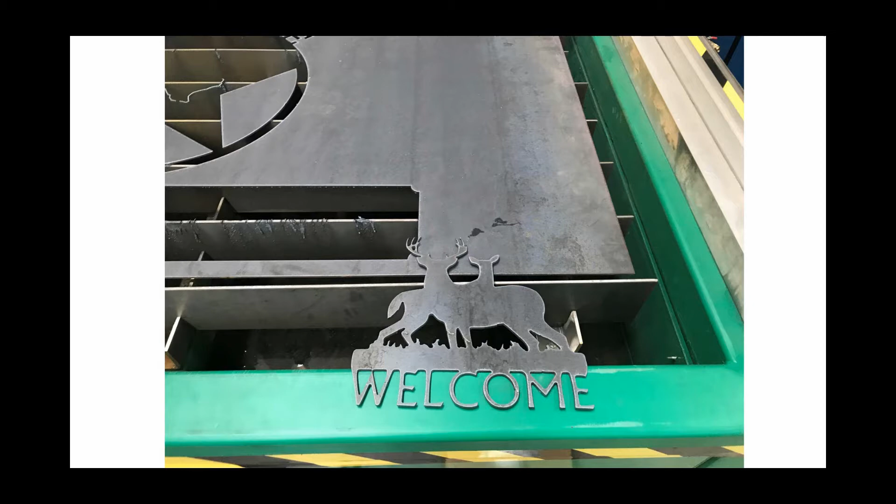So, for instance, this is a simple welcome sign. And the part could be easily imported from Google. You can actually go from a Google image to a part in a matter of a couple of minutes. And we teach you how to weld the drawing together. This is actually a fairly simple project.

This one here, you can see that they did the cutout. Really nice cut quality. You can barely tell where it was started. And actually, you can take your fingernail and just knock that blow-up off of where it did the initial pierce. Looks like another pierce point here. You can tell where they're at, but they're fairly fine. And more than likely, this wasn't done with fine cut consumables because it's even finer in most cases if it is. And here, they left a little bridge here to keep this piece in.

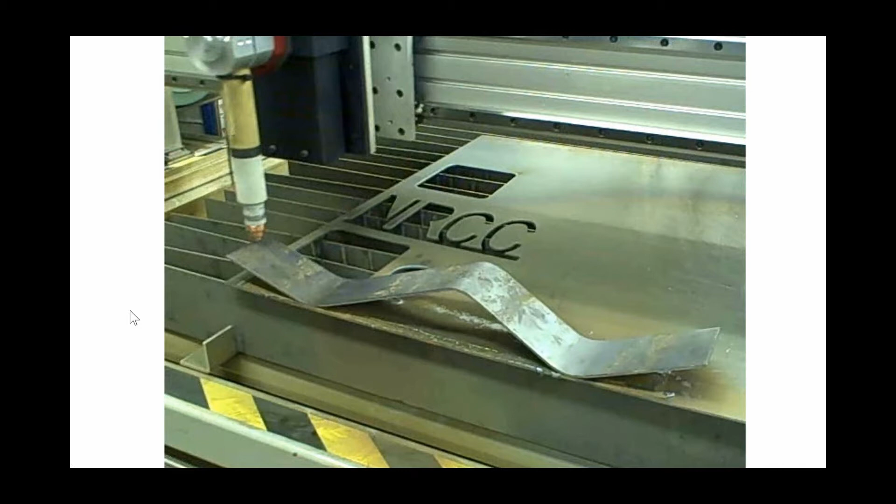One thing that's important in a plasma torch is a really good torch height system. And we have an automatic torch height system that's second to none. I like to brag about it by showing you this video. And the reason it's important is when the metal is heating from the cutting process, it'll tend to warp. Now, I've never seen metal warp this much, but if it can do this, it can certainly account for the smaller variances from the cutting process. So this is to show you how severe it can actually be, and yet it will keep up with it.

Little blow-off because of the varied height, but that will actually knock off very easily, and it didn't crash. The other reason why it's so important is you don't want the tip to touch the metal because it'll shorten the life of your tips, and sometimes it'll actually put the flame out. So to keep it moving and to have the best possible quality and a long life of the consumables, an automatic torch height system is crucial.

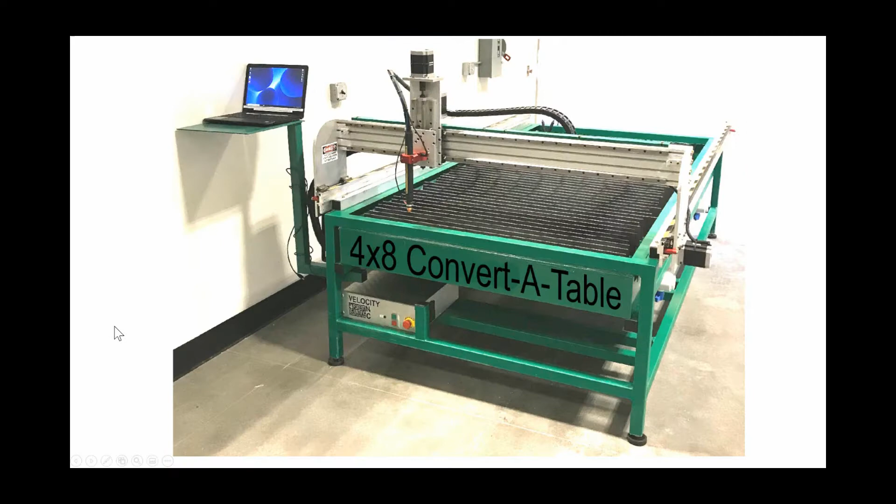This is the Convert-A-Table. We're the only company that has a product like this because it's completely a router and completely a plasma cutter. And so it has a routing table that actually allows you to hold the wood in place, and it seals the water bed. And it's about a 10-minute conversion to go from a wood router to a plasma cutter. You take the wood cutting table off, switch out the router head for the torch, and you're ready to run in plasma mode.

This is often used in schools that don't have enough space for two machines, or maybe the budget's tight, so someone will start off with this and then they'll add a router later on. Or maybe it's like Alaska where it costs so much to get it up there and then the classrooms are smaller just because of the cost of building construction in that part of the world.

A lot of schools will want to have an actual separate router if you're going to be doing a lot of cabinet making, because we don't offer a vacuum table on this type of unit. It's only a clamping system, and it's always best to have a vacuum table for a router that's going to be doing cabinet making. But this gives someone an option to start off with the capabilities of both machines if the budget doesn't allow for both machines, and then leave it as a plasma cutter and add a router later on.

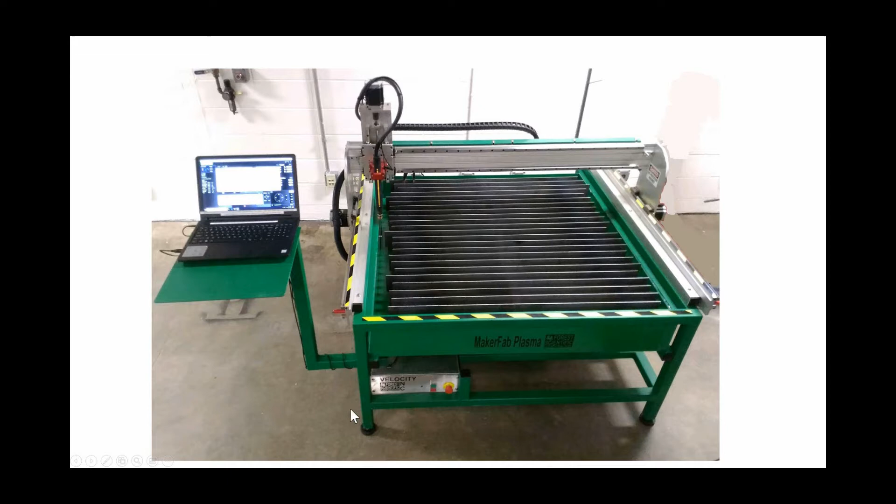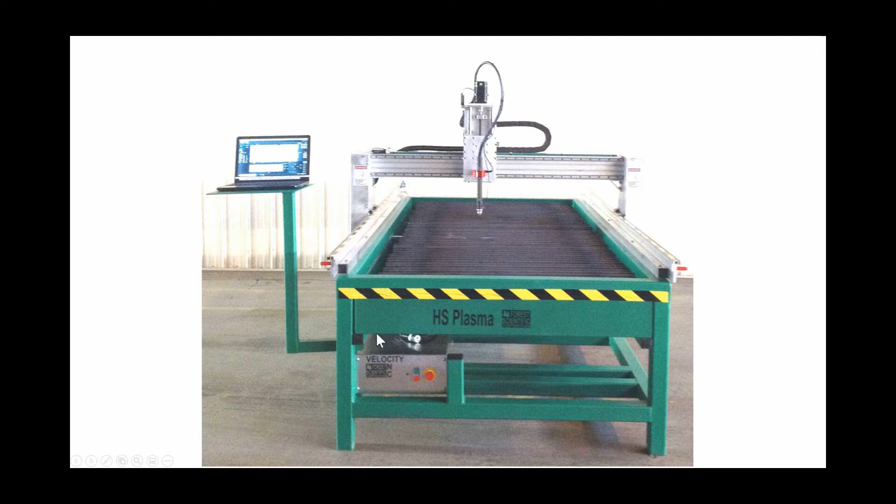It's even heavier duty steel construction, and it also uses closed loop servo motors versus these stepper motors on the lower costing models. I'd love for everyone to have this model because it is the very best. However, anything that can be made on this can be made on even the entry-level machines. Might be a little bit slower, but anything could be done on each level. No one's ever been disappointed for going higher.

And we also offer a trade-in program so that, say for instance, you are on a tight budget, you could start off with a lower-end model, and then if you purchase a higher-end model within the first year, we actually give you 100% credit of the purchase price to upgrade to a higher-end machine as time goes on. So you're not stuck with a box of parts without all the other parts you need, sitting there for years until you can put it all together. You actually can start off with something and make it usable.

We have various advantages. Number one, we have been around for a very long time. Most of our competition has not been making CNC machines for over 31 years. And so we have experience and longevity of being around for a long time. Our machines come fully assembled.

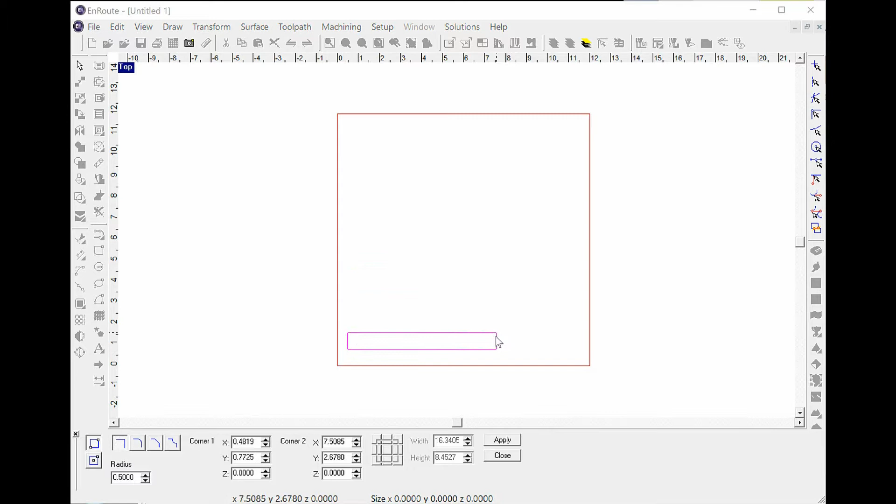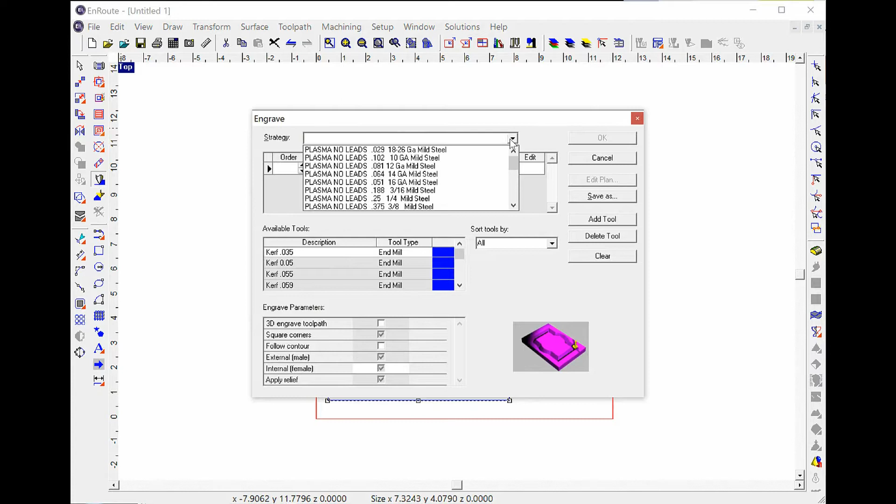So for instance, if I'm just going to draw a simple rectangle, I can draw this rectangle, and I can select engraving, which, when we're using plasma, is just telling it that it's going to be the center of the cutter on the center line versus actually engraving. Although it is possible to do an engrave. This time we're just cutting center of the line. What I'm going to do is select a strategy. I'm going to say 12 gauge steel, hit OK, and that actually generated my tool path that I can cut this out.

Instead of cutting right on the line, I just hit this button to delete the toolpath I just made. I can do a kerf compensation. So if I click on kerf comp, I can select, again, 12 gauge steel. I can come in and tell it I want to have a lead in. I can set the angle of my lead in and hit OK.

Now, for full disclosure, I'm going through this pretty fast. When you get a machine, we actually come in, set it up for you, teach you how to run it. We go quite a bit slower because we want you to actually do it and make sure you really know it. We're really on a very short period of time, so I'm trying to cram more than we can actually fit into the time period.

So anyway, I'm going to edit my entry exit, and I can actually turn this lead in line so it's here. And notice these little arrows, that's the direction I cut, so it starts off the part and comes off. Another way that we could cut out this exact same piece, and I'm going to delete this toolpath, would be to do a kerf compensation, but instead of doing a lead in on the line like that and staying right on the line, we could do a loop corner. And I'm going to give it a 1/2 inch offset and hit OK.

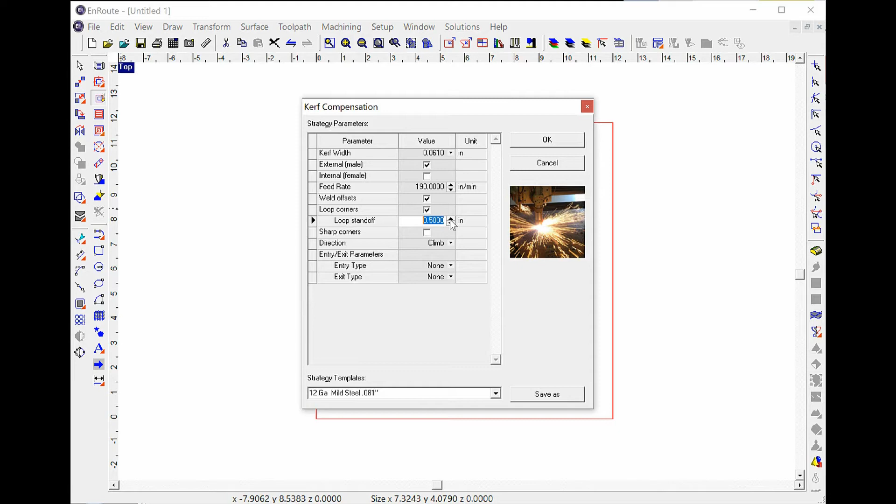So with plasma cutting, the plasma cutter is very greedy. And if you slow down to go around this corner, it may round the edges a little bit because it's always trying to get as much material as possible. And so this feature takes it off while it's going in and out, because even if you're driving a Ferrari, you can't make a turn without slowing down to make that turn.

So what this does is it loops off and then loops back on, so that way all of the accelerating, decelerating is out here, just like the car going too fast. And then when it gets back to this point, it's in the straightaway and continues on, slows down, makes that turn, slows down, makes that turn, and continues on. Now in this case, it's starting here, so I want to change this starting point as well. So I'm going to hit Edit Entry Exit, just drag this over, and then right-click, exit this tool.

And so from here, you can cut on the line, you can cut beside the line, you can loop off the edges of the lines to get the very best of cut. A very common project in most schools is signage.

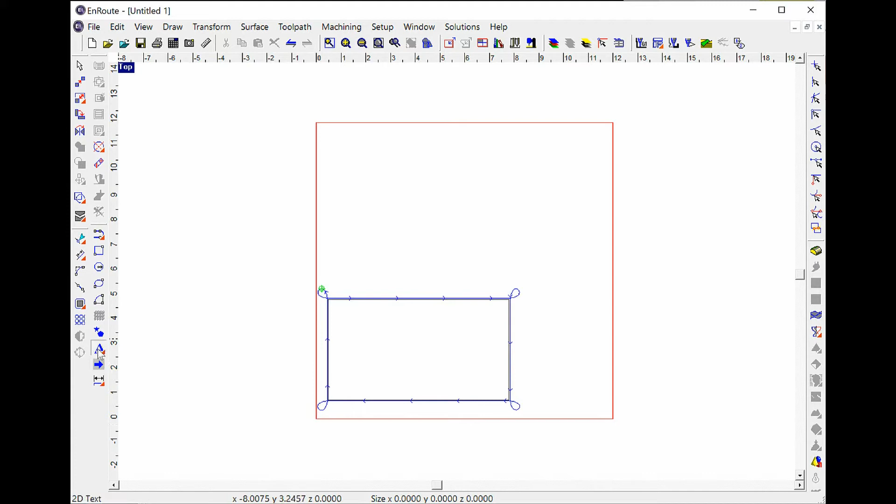And so if we go to A for text, and we come, say, to here, and I'll just type ABC, notice that these are a stencil-like font specifically made for plasma cutting. As far as I know, no one else has a font like that.

And you can also go in and very easily create your own fonts by altering the letters, which is what most people have to do. So if we wanted to, we could just do some edit, trim and extend, and cut out and modify any font to be able to work for this machine.

So right now I'm going to just cut on the line. So I'm going to click Engrave, select my steel thickness, 12 gauge steel, hit OK. And again, you see these arrows. Now, little tip, toolpath, edit, entry, exit. If you're starting a line, you may see a little divot. But if we come into this little corner and do an inside corner, very rarely will you really see it, especially if we're using fine cut consumables.

So I'd like to mention the consumables. With a PowerMax 45, which I consider the most ideal for most schools, because most schools are only cutting 1/4 inch and below. Now, if you're going to be cutting thicker materials, you can go up to an 85 amp torch or even larger. But since the vast majority of schools may be 3/8 and under, I don't recommend oversizing your torch. You're better off having a torch that's in the sweet spot.

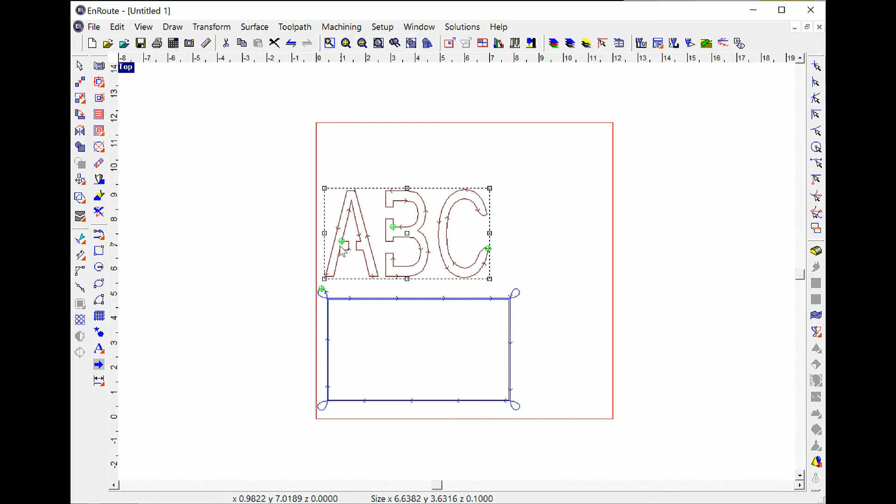So if you have a 45 amp torch, you can do up to 1/2 inch thick. But the sweet spot is really that 1/4 inch and below, and you can use these fine cut consumables. They'll actually give you a laser-like cut quality.

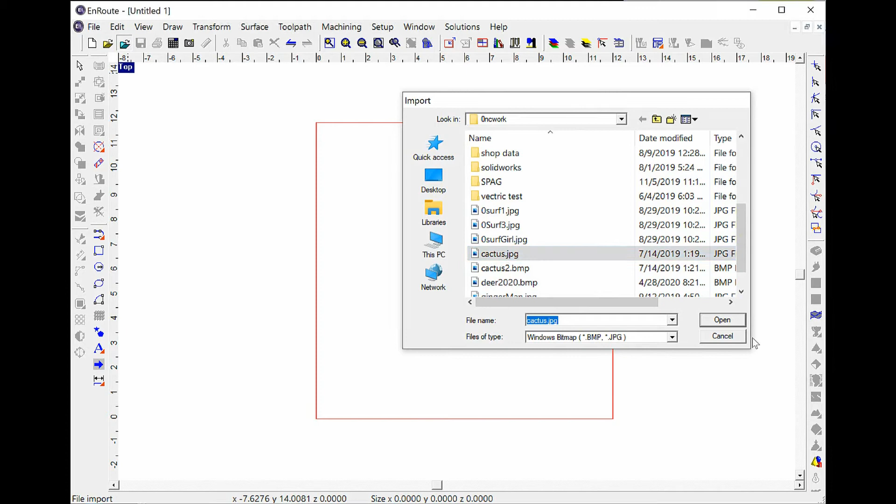And not only can we do letters and things like this, but we can also bring in things from Google. So if I go into Internet Explorer, or maybe Chrome, whichever browser you like, I could do a little search and download a piece. So I have pre-downloaded some objects. And so what I'm going to do is bring in this cactus. And with this cactus, I'm just going to hold down my Shift key and bring it down a little bit. And oops, I resized it a little bit too fast there.

And all I have to do is click on this option here, and it will convert this raster image into a vector image. And so what I'm going to do now is go to Transform and Ungroup. And I want to get rid of this right here. But I don't like this little divot here. So what I'm going to do now is edit this curve.

And I can quickly come in. I think I'll just delete this little point. I'm going to zoom in so I can see what I'm doing a little better. I'm going to delete this point. And then I'm just going to click here and drag this up. Yeah, looks like I need to get rid of a couple more points here.

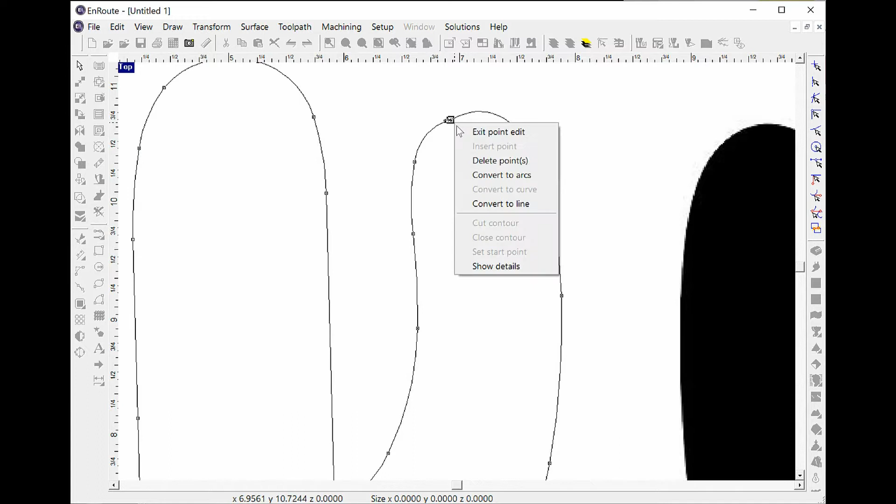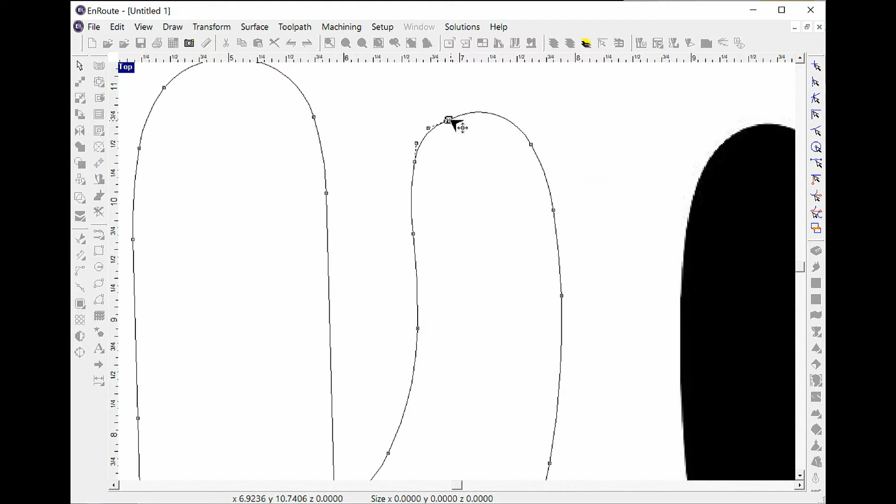And now I've edited the artwork that was less than ideal that I grabbed from online, and made up for it. And let's go to one more point. Probably get by without it. And now it has the nice curve that we actually want. So we start off with this with something written on it. And now we have a cactus that we can cut out.

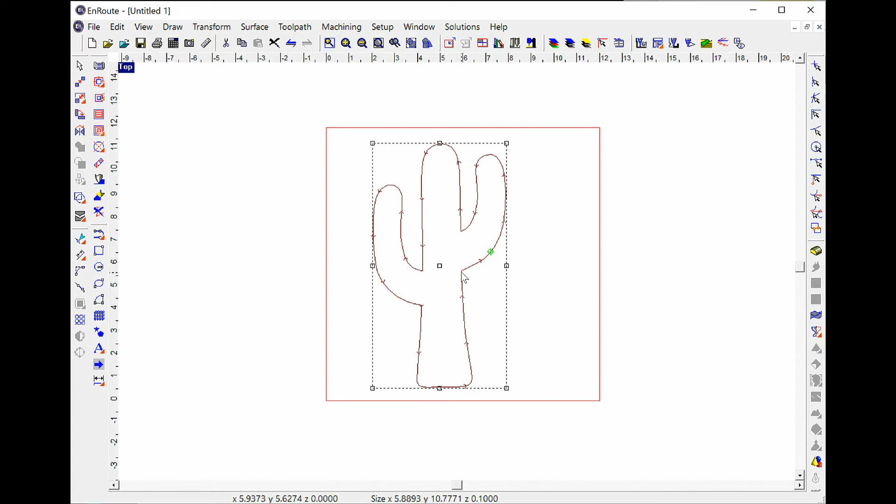And so again, if we want to cut it out, we just click on engrave, select our thickness. And again, it's not engraving, it's just that the center of the cutter is following the center of the line. And again, I'd like to hide this in here. Toolpath, edit, entry, exit. I'm just going to drag it into this inside corner. Right click, exit this tool. And then all I have to do is go to machining, output to file, and that'll create the industry standard G and M codes to actually make this part.

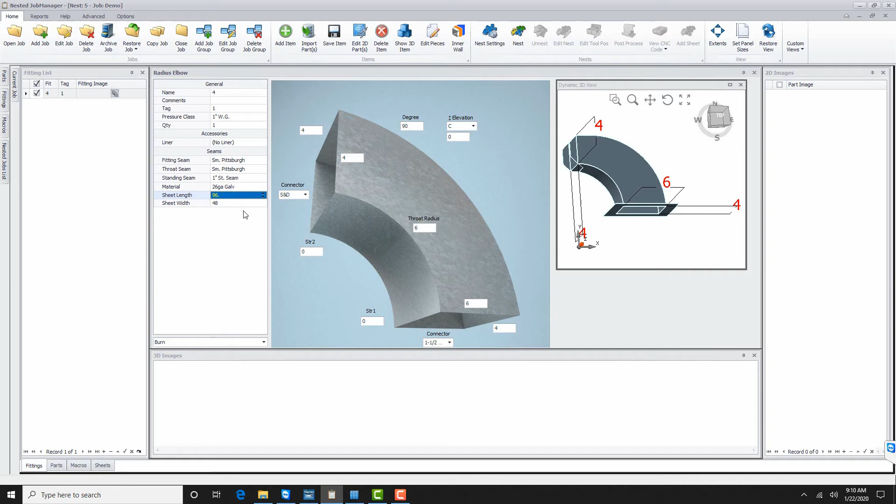We're going to make one of these, I assume. 1. No liner, so that would be your insulation. Fitting seams, small Pittsburgh. Throat seam, small Pittsburgh. And then if we were to have to chop this, it would be the standing seam. Right. Material? 26 gauge galvanized. And then the same sheet size, 96 by 48. Correct. If that all works okay, everybody's happy with that, we would go to save.

It'll generate your 2D images here and your 3D images here. Then we would go to nest settings, tell it we want to nest all of them, just the one. We would change the sheet size back because it remembers what you used last. If that's all okay there, go down to nest. And you have your one sheet. It's only using about 14 inches by the 48 long. So then it would actually just trim off that excess, and we'll watch it do that there.

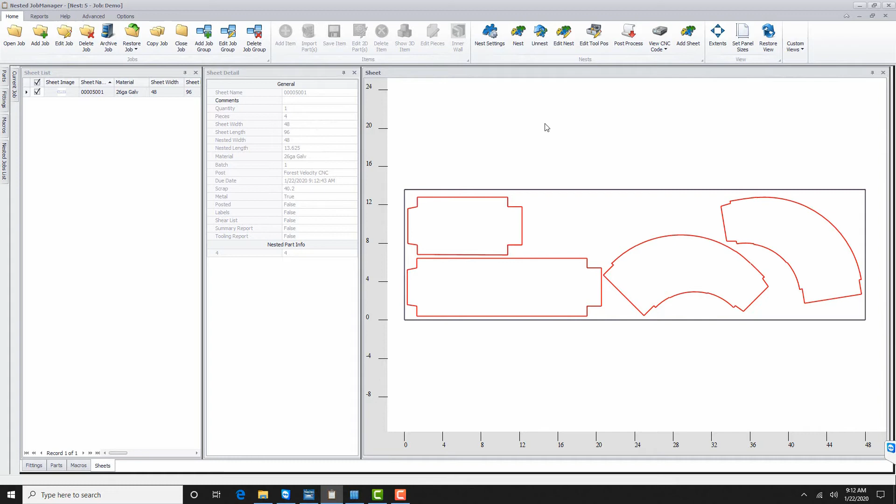If that looks okay to you, if you're happy with that, you would post it. Make sure your path is correct. Make sure, again, your amperage is correct and your gas is correct. And then here, same thing, just reports, nest summary. Your summary and your labels you have to do after you've posted it. If you do it before you've posted it, you won't get any information as far as the sizing, the material, or the image there. Print.

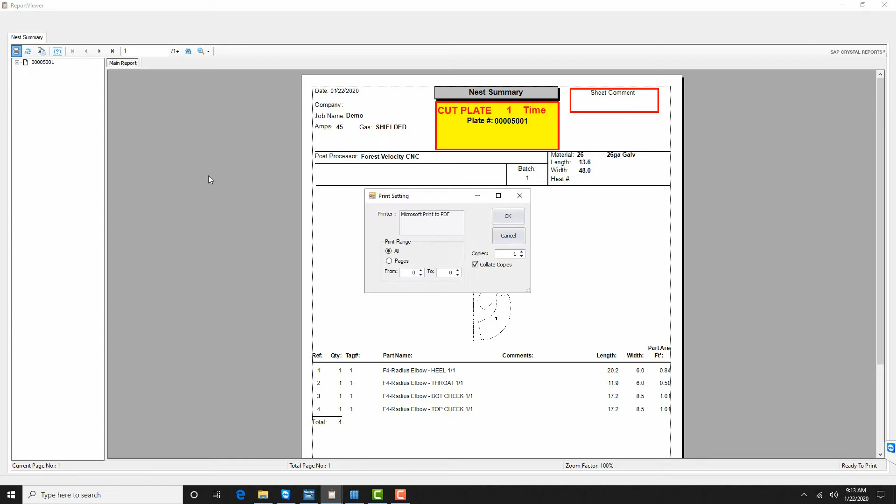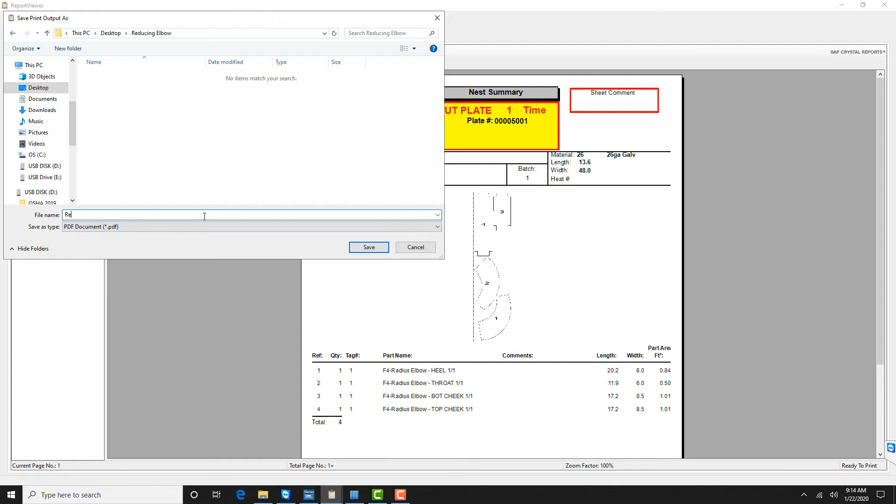And save that under, I want to call this reducer or reducing elbow. Yes, that's fine. Then you have your plasma labels. And same thing, you just print, okay. And since we have that directory there, we just click on that and just add labels.

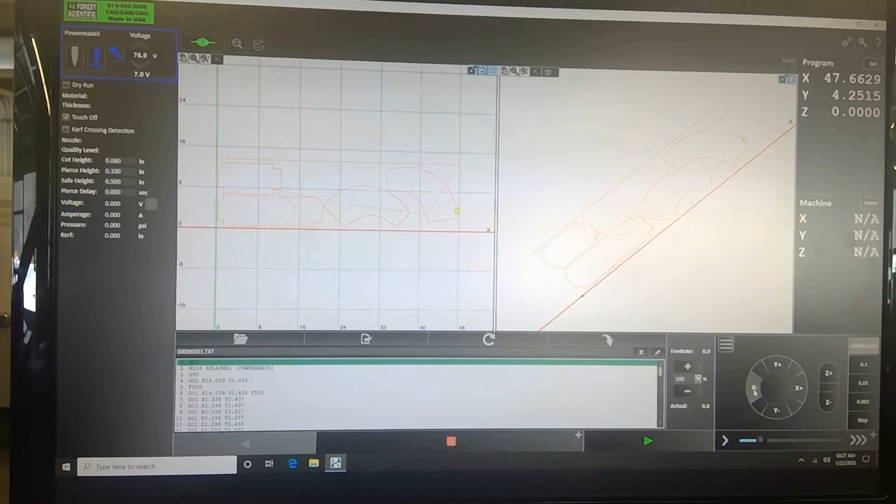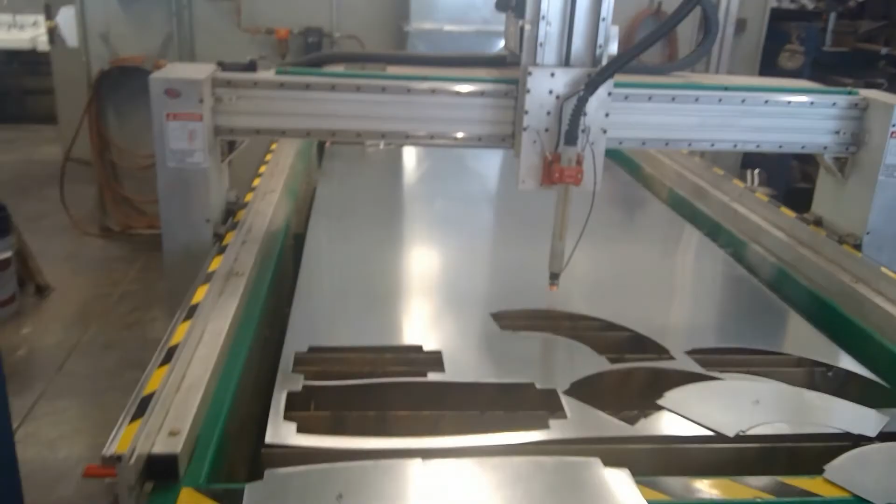And that's your process. 90-degree fitting right out of the CAD/CAM software, and the solid lines are cutting movements, the dash lines are rapid movements, then it actually shears the piece off at the end. And so now we're going to hit the green button for play, and the machine will begin moving. So right now it's moving over. It's set up to automatically sense the height of the material, and then begin cutting.

And since it's a very thin gauge of metal, there is some warpage. The height is constantly changing, so the automatic torch height system of the machine is making up for it so it doesn't crash into the metal as it's constantly changing. The machine is also automatically setting the voltage when it first starts cutting to be the correct voltage to maintain the correct height in making these parts.

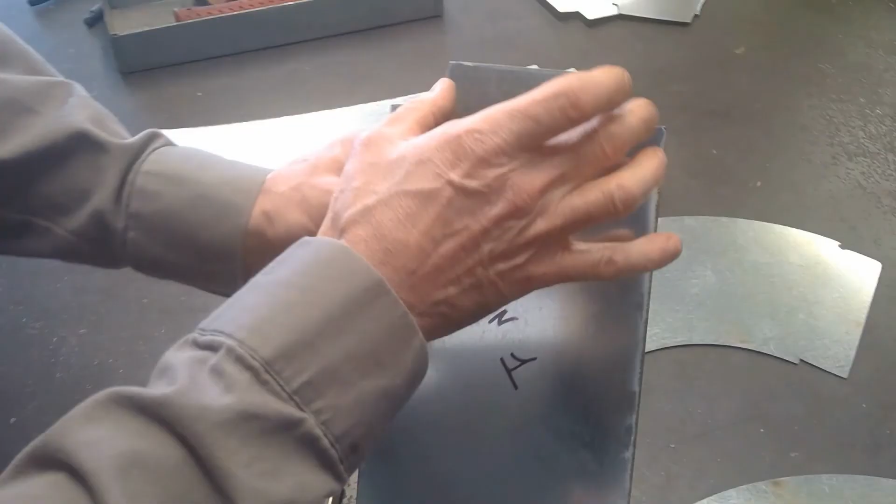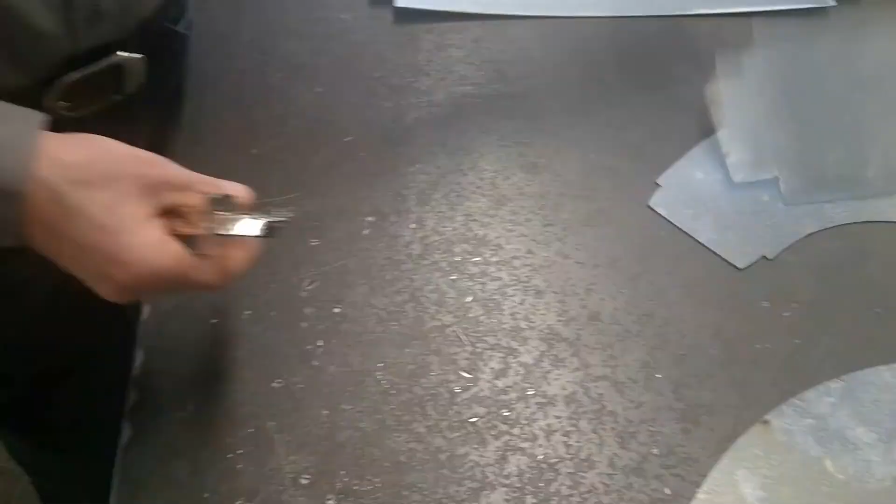I'm going to start by just applying scribe lines to one of my connector ends. What we have here is, on the small end of this reducing elbow, we have a slip and drive connector end. And on the opposite side, on the larger connector end, we have a flange and a hem. So I'm just going to apply some scribe lines so I know where to bend my pieces in the processing. We're going to have a 1-inch flange with a 1/2-inch hem. So there again, I'm just applying some scribe lines to this connector end.

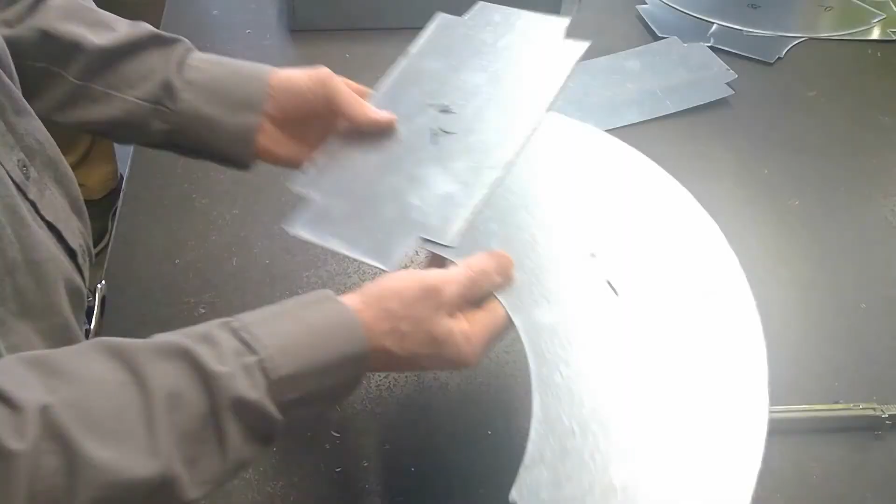I know I have the inside of my fitting because I marked it with a Sharpie. Hopefully in the future we will have tags to apply to these fittings, as many fabrication shops have. At this point, I'm going to go over to one of my edging machines, and I am going to apply an edge or a flange to my two cheeks here. So we're going to head over this way.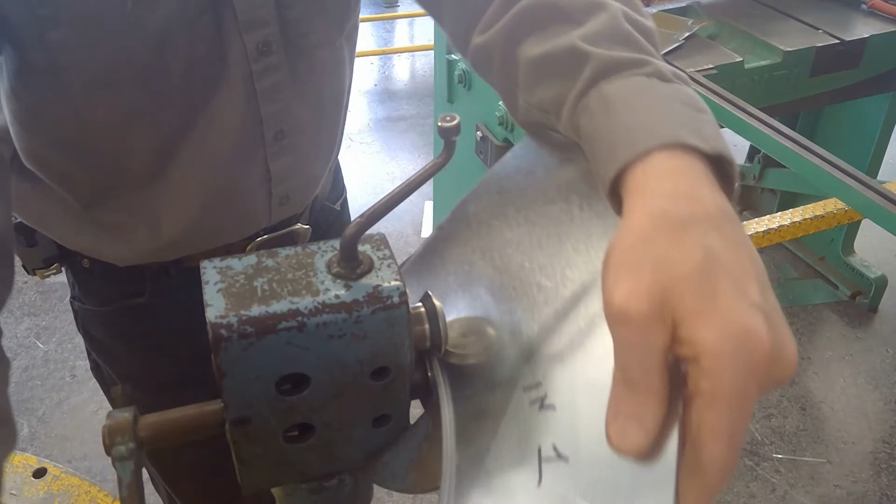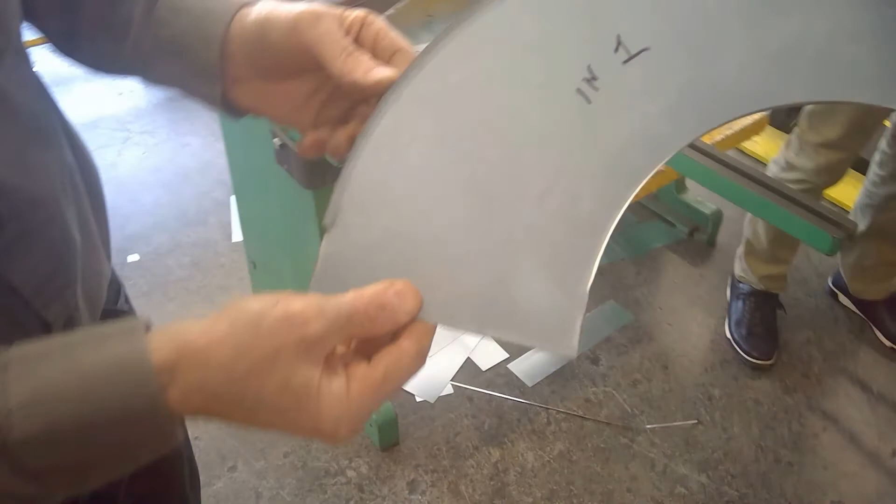As you can see, the second time around is a little easier, and it will flatten any deviation in this flange. You can see we have a real nice smooth flange here on this cheek. My second time through. Here again, that's the finished flange on each cheek.

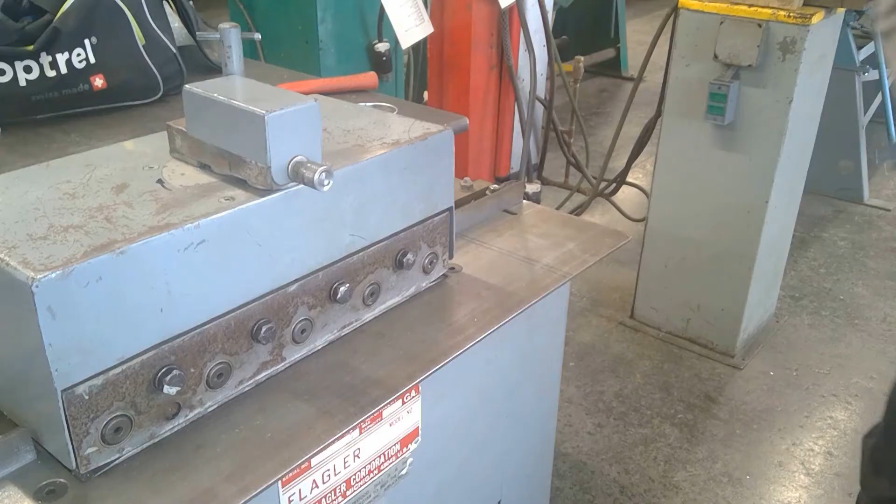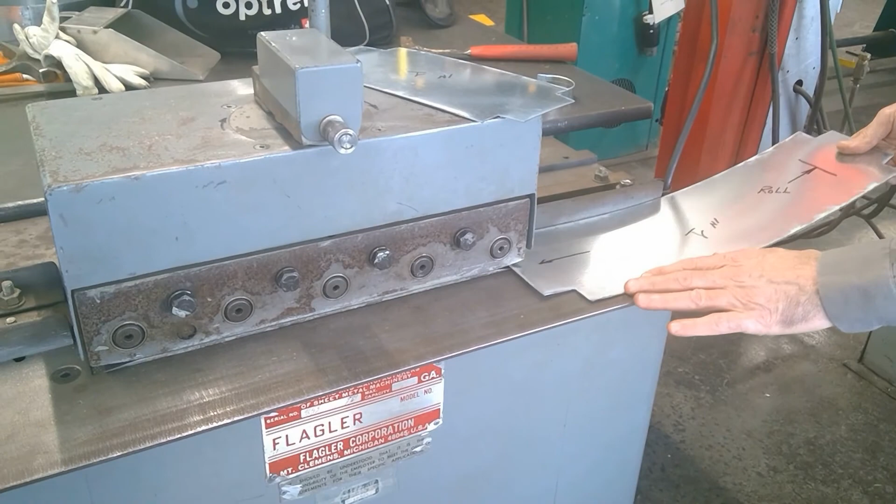Okay, at this point, we have our throat and our heel. We need to apply our pocket, our Pittsburgh pocket, to both pieces. So I'm going to insert into the Pittsburgh lock forming machine. Then we're going to spin our parts, feed them back in.

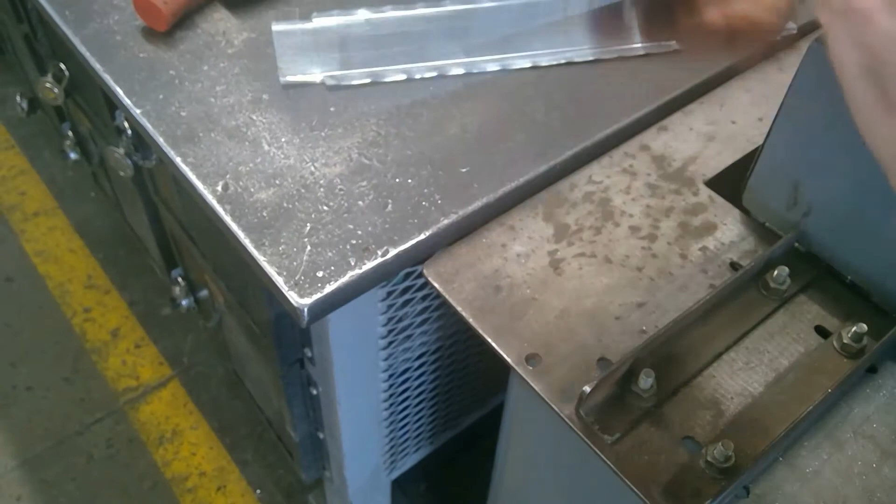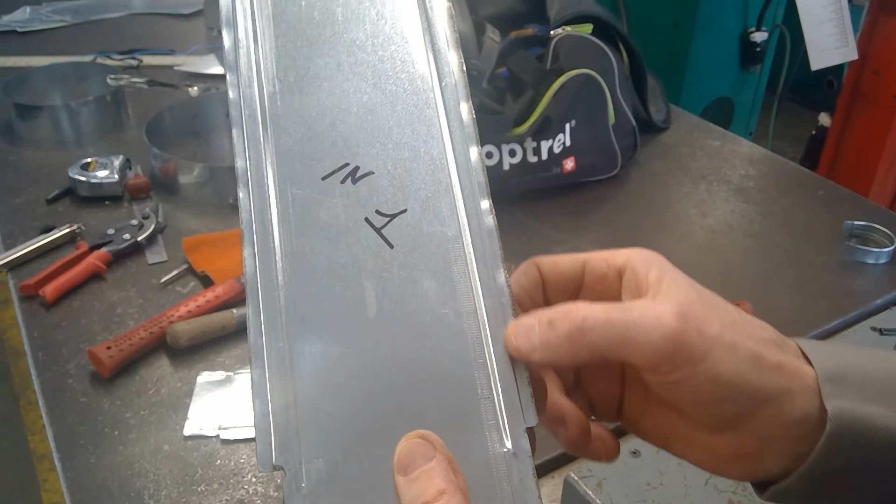And this offsets a little bit on this connector end that is going to have the flange and the hem. It just flattens everything out just a little bit and makes it a little bit easier to fold in the bar folder for our hem and flange. Now we're going to insert some strips of metal into the Pittsburgh pocket. This allows us to roll our throat and heel into slip rolls without crushing this pocket. So we're going to head over there right now.

Okay, so now we're at the bar folder. I'm going to apply the hem to each piece before I proceed into the slip rolls. I feel it's a better time to do this in the fabrication process. I already have it set at 1/2 inch because this fitting requires a 1/2 inch hem to the outside. So I'm going to do that 4 times.

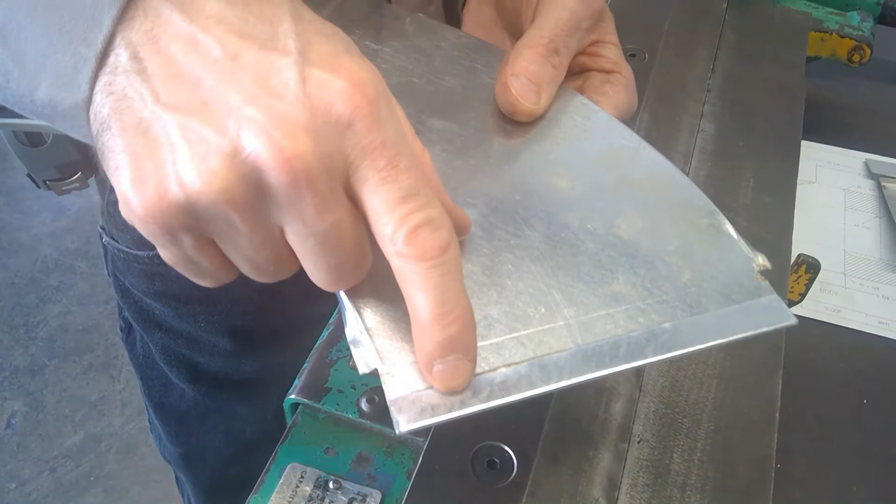The throat and heel I just completed. Now I'm going to do both cheeks. And there's our 1/2 inch hem for this connector end.

Okay, so now we're at our slip rolls. We're going to form our throat and our heel to the certain radiuses that we have here on our cheek. I'm going to use my cheek as my template because these parts have to fit on here, so there's no better template to use than the actual piece that you have. And be sure to roll these in the appropriate manner, so we don't end up with the outside of the part on the inside.

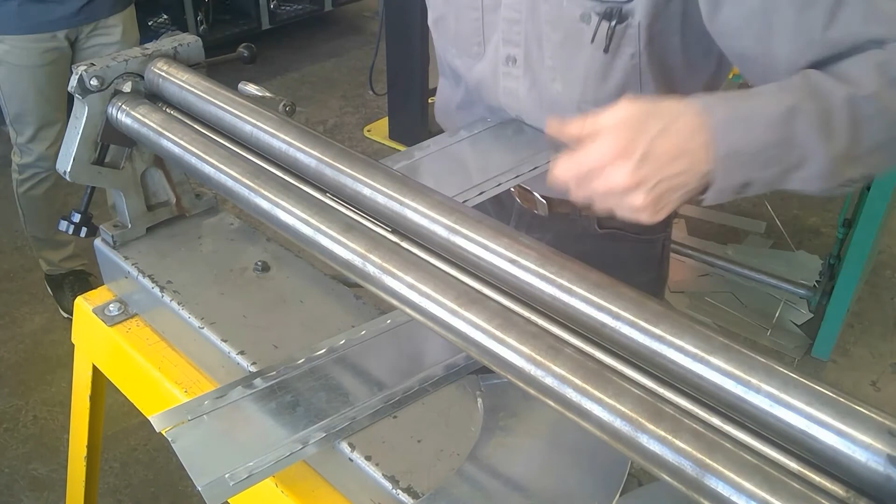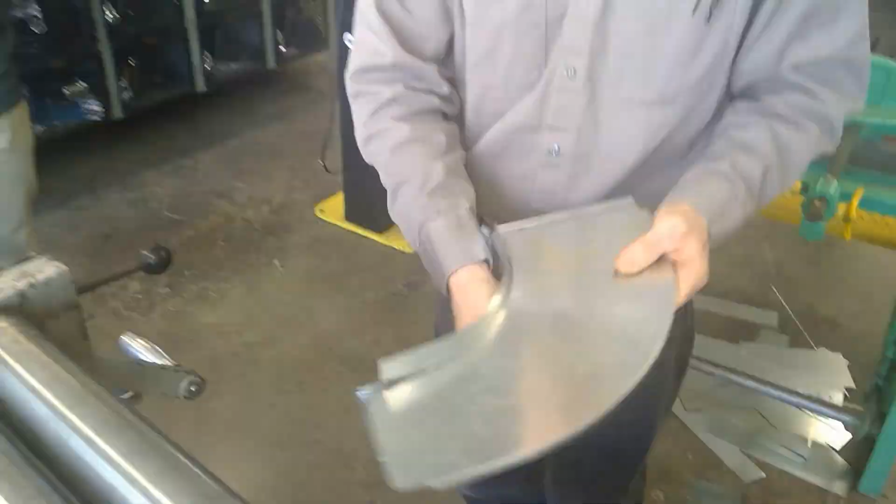So we're just going to make some small adjustments here and roll our throat. And we're going to see how this fits up to our cheek just by moving it up to there. And you can see I'm really close there. I think that's a good start for this particular part.

I will lower this back roll so I don't get quite a tight radius as I did with the throat. The heel will have a larger radius, and we're not rolling all the way through. We have a little bit of straight here on this small connector end, actually 2 inches of straight. So it's not a continuous roll. So I will start with the larger end, and

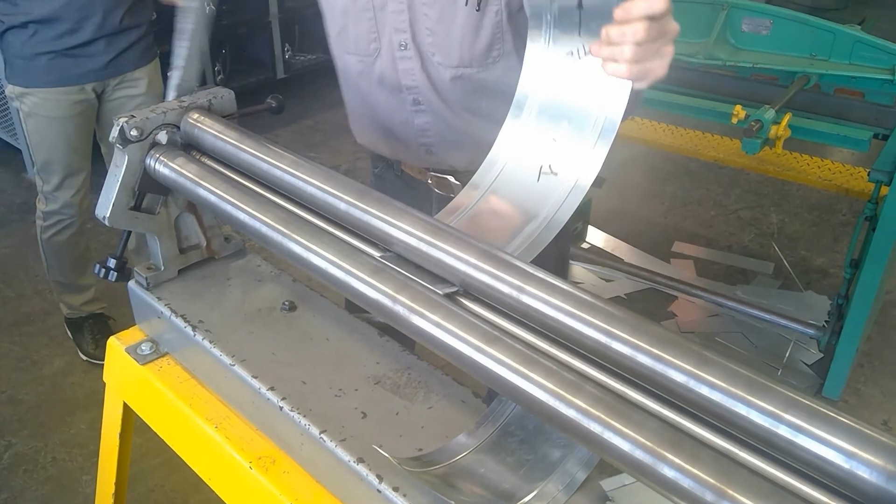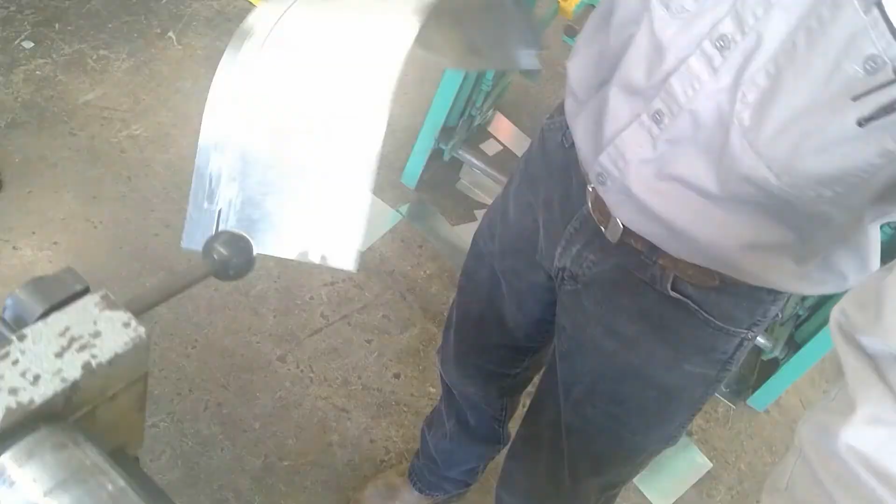I'm going to stop here on my mark, and then I'm going to check this and see how well it fits up to my cheek. And you can see I'm a little tight, but that's just going to be fine. I will just work this a little bit out by hand, and I can get this to fit quite nicely on the cheeks.

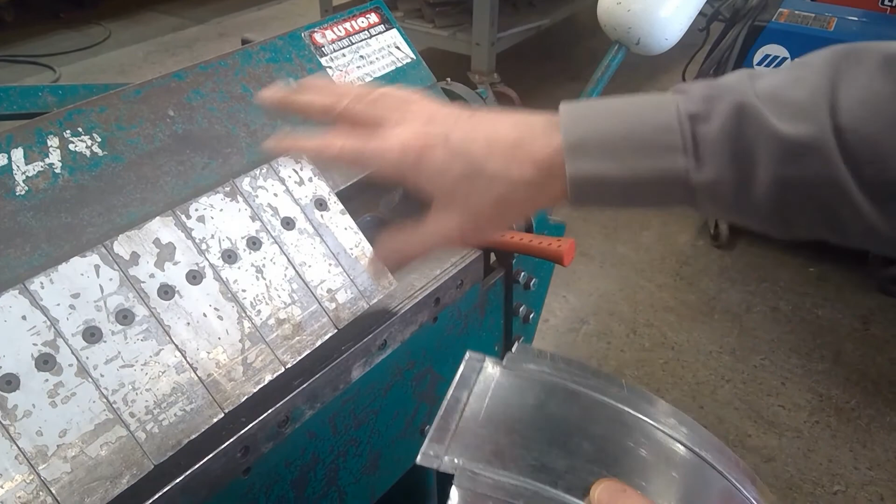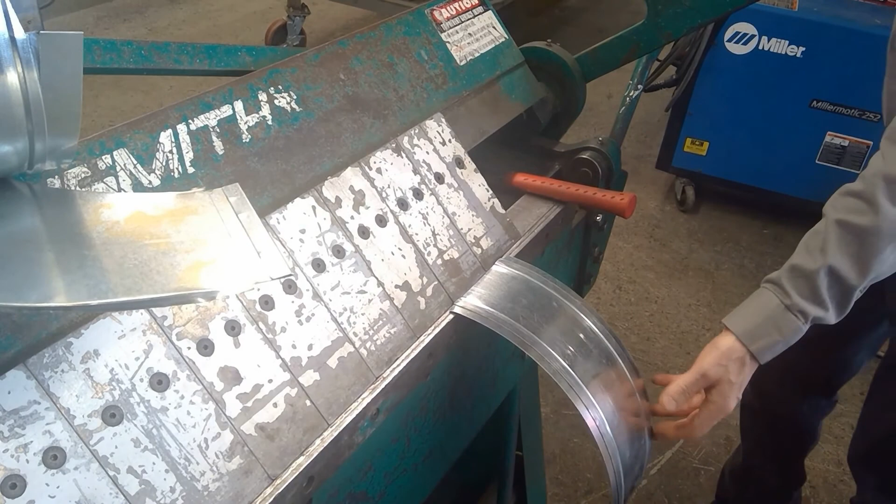At this point, we have everything formed and rolled to where we need it. I'm going to finish my connector end with the flange and the hem on it on this box or pan brake. Very convenient way to do this. Just put your piece in, clamp it on your mark, and we're going to come up 90 degrees. Like so. We're going to do this 4 times.

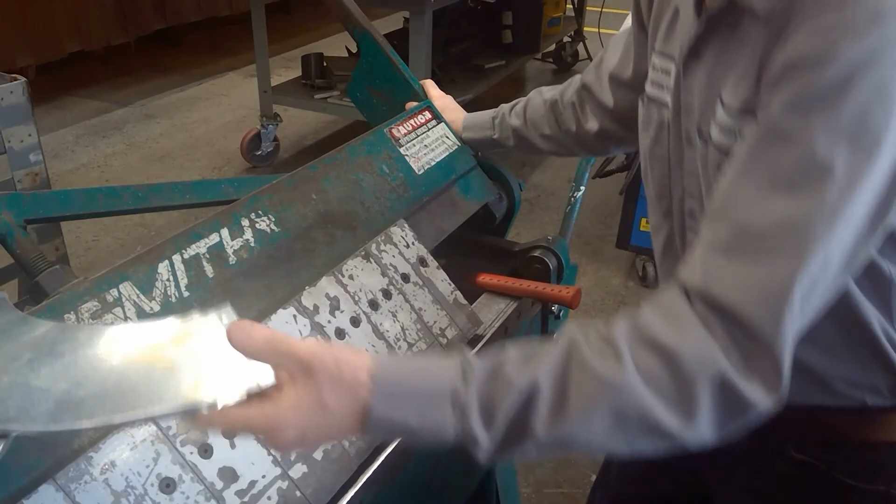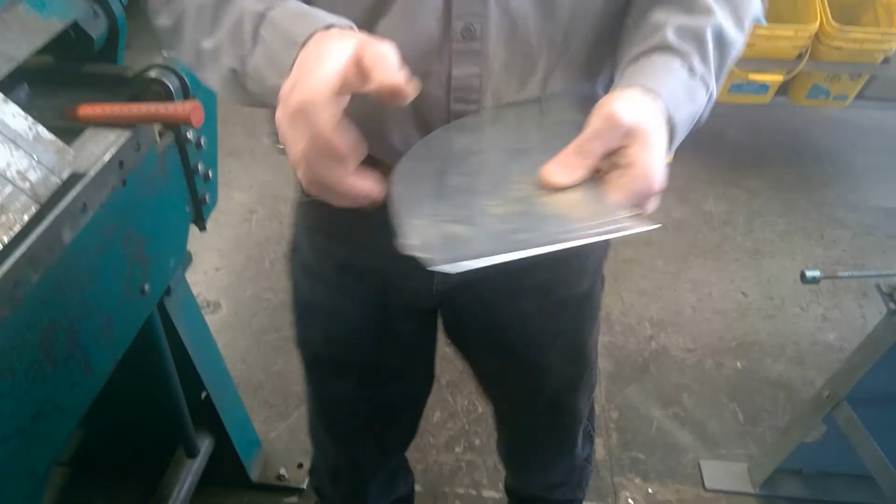And you can see, as I did earlier, I flattened these flanges out just a little bit. This allows me to get in and bend in the appropriate location. After I bend these flanges up 90 degrees, I will fold these back down. You'll never know that we unfolded them to do this process, because this will end up in the pocket of the Pittsburgh lock.

At this point, my connector end is complete with the 1-inch flange and 1/2-inch hem on it. As I said earlier, we're just going to straighten these out, and then we're ready for assembly of this reducing elbow.

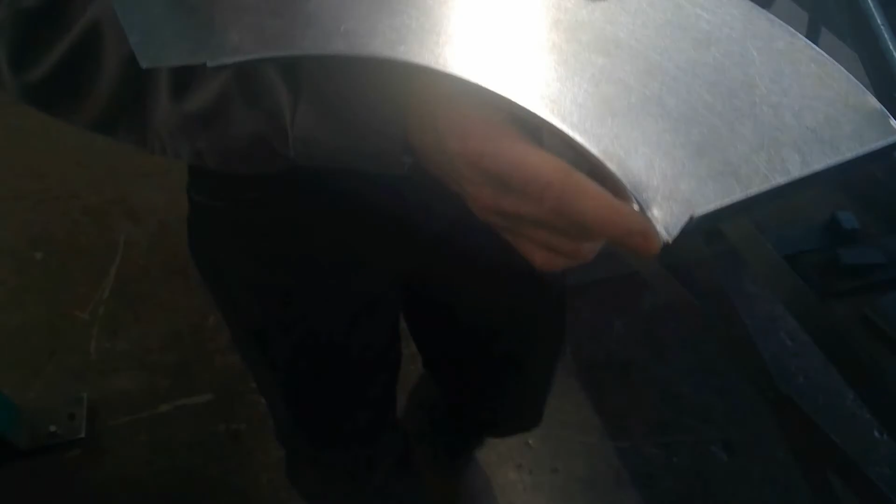Okay, so we're back. We're finally in our final stage of fabricating this 90-degree reducing elbow. We have all our connector ends done and complete, except for bending the drives. We'll do that after. But our pieces are already bent and rolled, and I'm going to start with assembly.

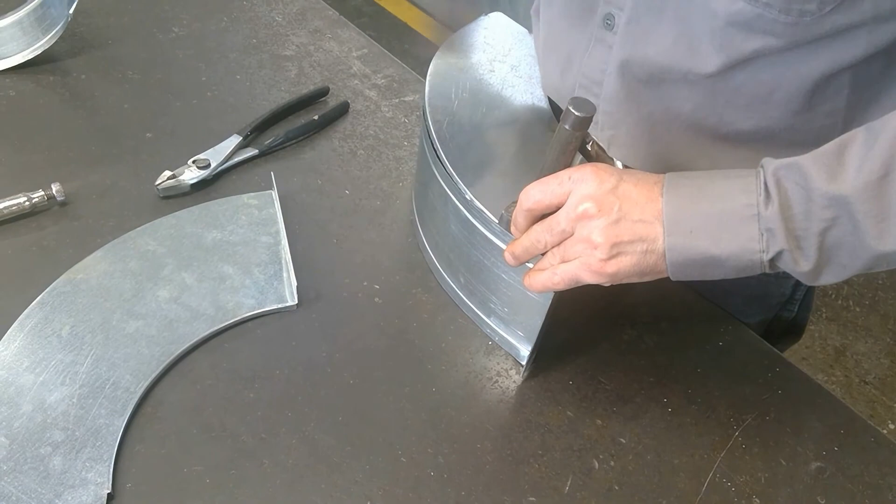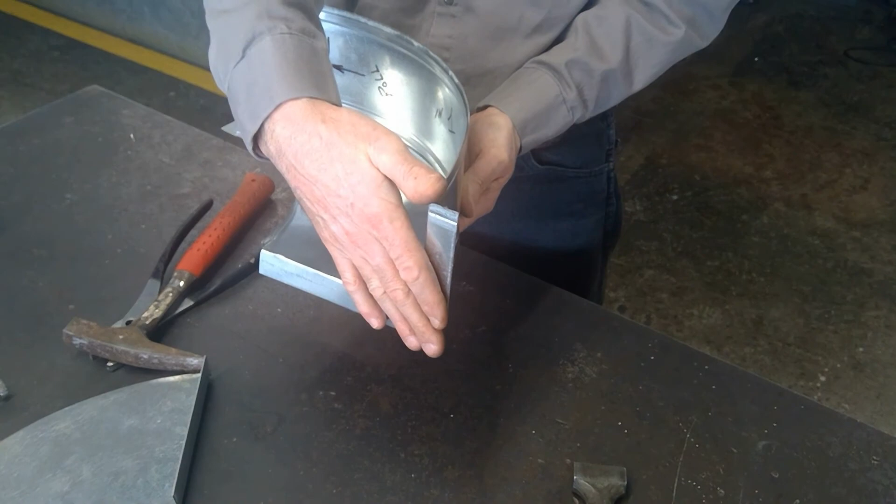I always encourage my students when we start to assemble fittings to start working our way from one end of the fitting out. And that's difficult at times because when you spin the fitting to put the other cheek on, usually we work from one side, from the right side to the left, or the left side to the right. So that's one common thing I try to tell my students: always start on one end, even though it might be awkward working the opposite direction.

The reason I have them do this is it will enable the part to be nice and straight, and if there's any deviation in the part, it will not twist, or as we call it in the sheet metal trade, rack. So that's a good habit I try to instill into my students.

As I start, I also use this. This is a setting tool for a pipe lock, or a hammer groove lock, actually. This does work well for getting the flange into the pocket of the Pittsburgh. Even though that's not its intended use, it's a very useful tool for doing such a thing. So I'm just going to take some pieces and tack this, if you will, in a few locations.

See how it's up against my body. Here again, this stops a lot of the bouncing and movement of the fitting, having it secured and in a stable spot, and you can see how that finishes. So far, this connector end is fitting up quite nicely. So we have this on.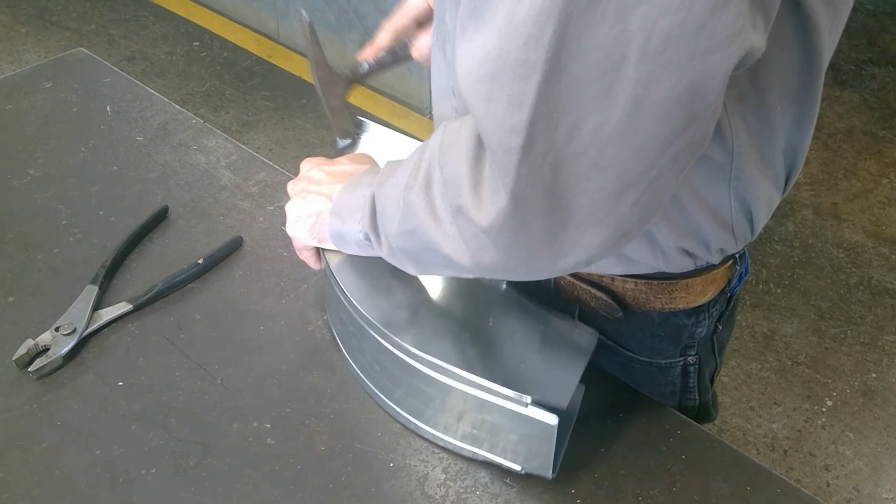I'm going to continue with my other cheek. And there again, I'm starting in the opposite direction, using my hammer lock tool to help me get the flange in the pocket.

And there again, whenever assembling something with a flange, we always want this flange to be to the outside of the bend. I've noticed in the past that when students, or anybody for that matter, assemble this, sometimes it tends to distort or crush these ends. So another tip as far as fabrication, I'm going to finish with the throat.

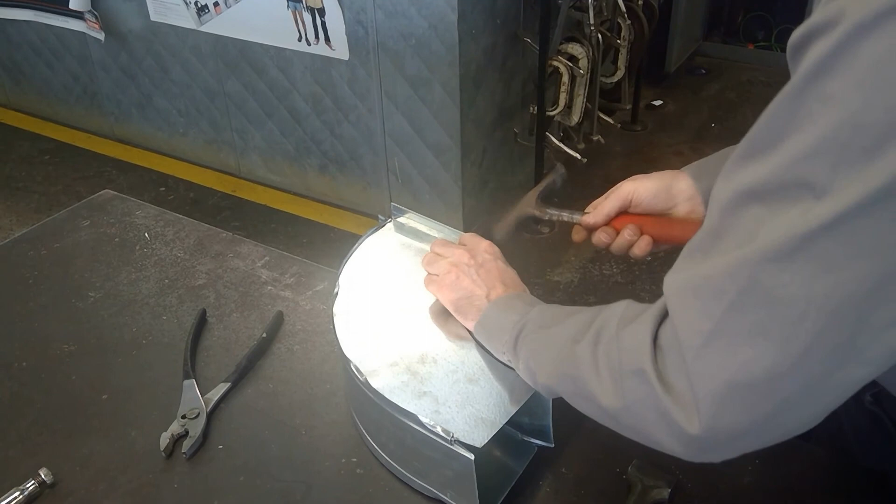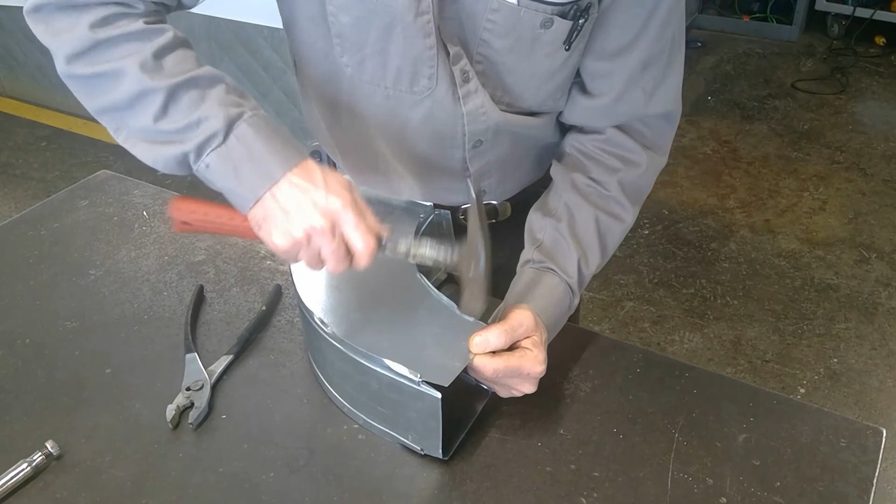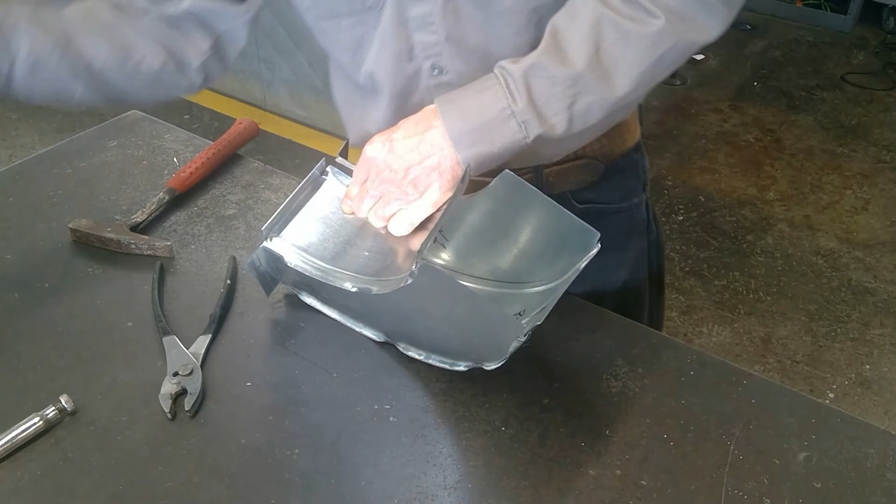Once I get it caught, you can see how if you take your time and roll this correctly, it will fit in quite nicely. Have to make a small little modification here. Have a set of pliers nearby just in case you have to make any small adjustments. Handy tool. Another useful tool is a screwdriver in case one of the sections in the pocket closes up. This is a handy tool just to open that up just a little bit. And we're going to make sure we're nice and flush here using the side of the hammer.

Now that I have this assembled, I'm going to give it a good look over. Make sure everything looks correct. Make sure everything looks flush. I will make some small adjustments for this flange after I'm done hammering the Pittsburgh lock, making sure it's nice and flat. And at the end, I will bend the 1/2-inch drives on this for a connector end. If we were to attach another piece to this, we need our slip and drive connector end.

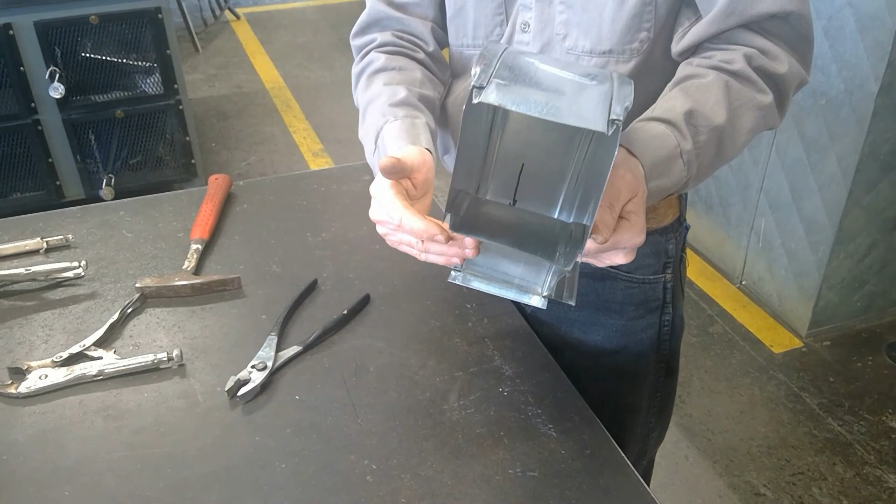So at this point, everything looks good. I'm going to continue hammering this Pittsburgh lock, get it nice and tight and as smooth as possible, and this will be a completed fitting.

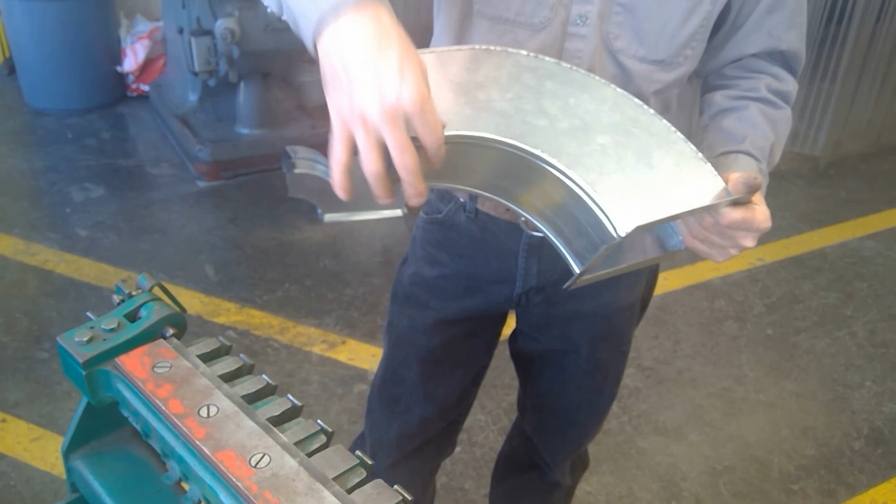Okay, so our fitting is all assembled, hammered together. Pittsburgh lock is nice and smooth. Our final step is to bend the 1/2-inch drives on this particular piece. So we put it in; this is made specifically for that task, and we're going to bend the cheeks on this particular part.

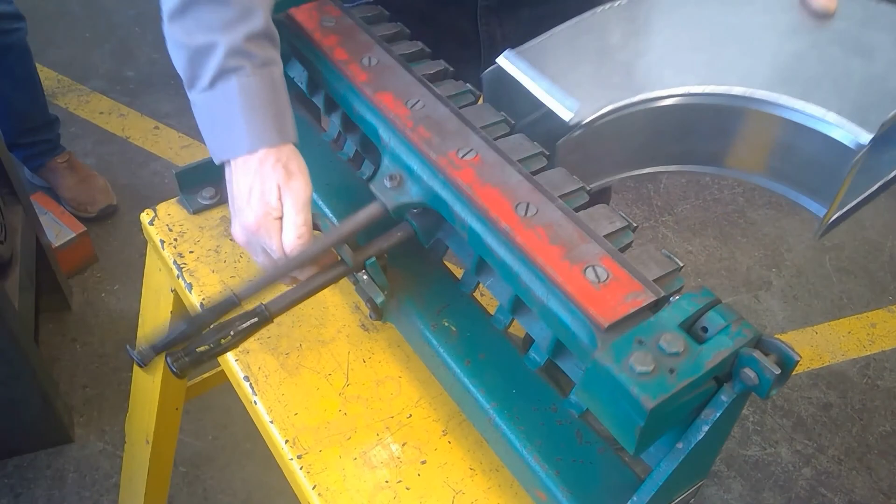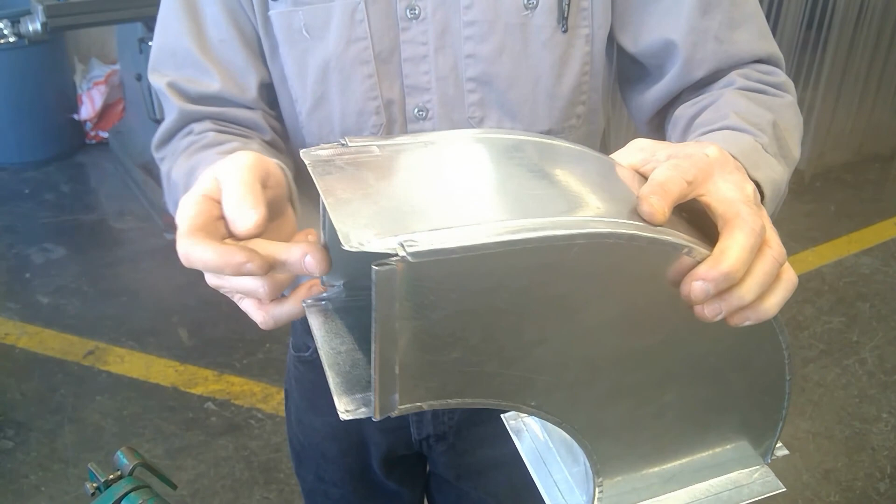Now this fitting is ready for installation. We have a nice flat flange here. If this was going on a surface where we could screw it in, we could use some sealer and screw it to that surface. And on the small end, we're ready to connect a slip and drive connector end to here, whatever that fitting or piece of duct may be.